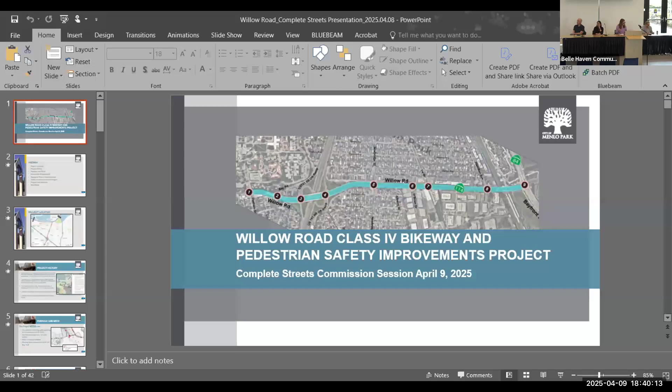Good evening, Chair Cole, Complete Streets Commissioners. I'm Christiane Choi, Senior Transportation Engineer with the city's Transportation Division. Tonight I'm going to be presenting about our Willow Road Bikeway and Pedestrian Safety Improvement Project. The city is partnering with the San Mateo County Transportation Authority to deliver the project. Tonight, Vamsi Tabjulu from the TA is here, he's the project manager for the TA, and I'm also joined by Prasanna Muthareddy, who's with Kimley Horn and Associates, she's the project manager with her consultant team that's assisting on the project.

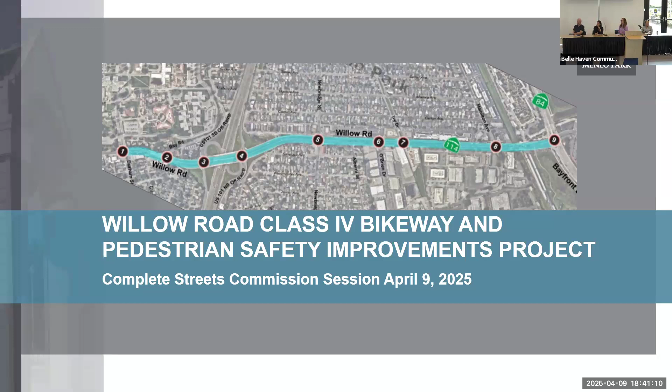So tonight's presentation, we're going to just go over the history of the project, the purpose and need, some of the community engagement that we've held, go into the proposed improvements, talk about some of the analysis we have done so far, then end with the cost estimate and next steps.

So this map here shows the extent of the project. It starts over at O'Keefe on the west side of 101 and then extends all the way to Bayfront Expressway. Most of Willow Road is located in Caltrans right of way, so a lot of coordination between Caltrans and our project team has been occurring throughout the project.

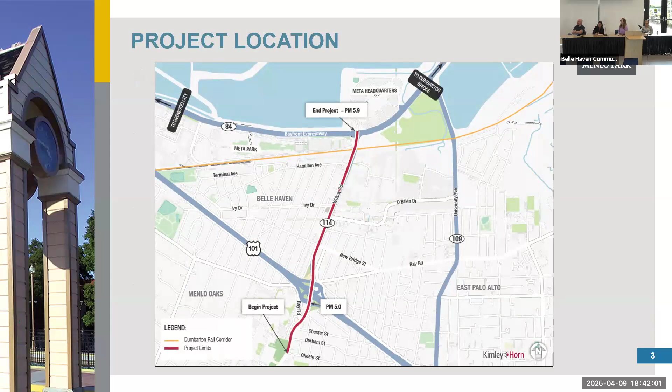Class 4 bikeways have been identified in a number of plans, including the C/CAG Bicycle and Pedestrian Plan, which identified Willow Road as a countywide backbone bikeway network. Our Transportation Master Plan also identified Willow Road as being a high-stress roadway for bicycles due to the high speeds and high volumes of traffic. The Caltrans District 4 Bike Plan also included class 4 bikeways on Willow Road and identified it as a top priority. So in 2023, Caltrans completed a project initiation document.

That was kind of the first phase in starting the project. And then the city then started work on the project approval and environmental clearance phase. That's the phase we're currently in. And we hired Kimley Horn to help us with that work.

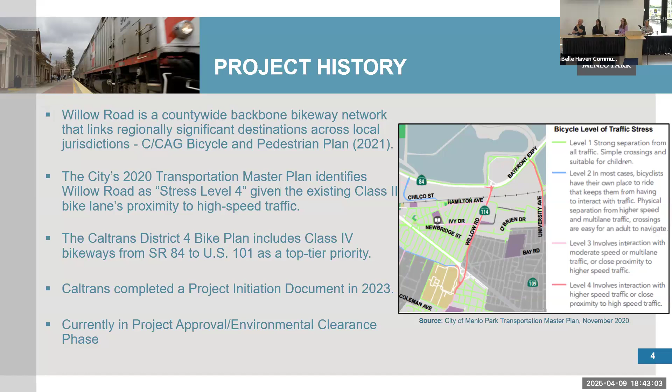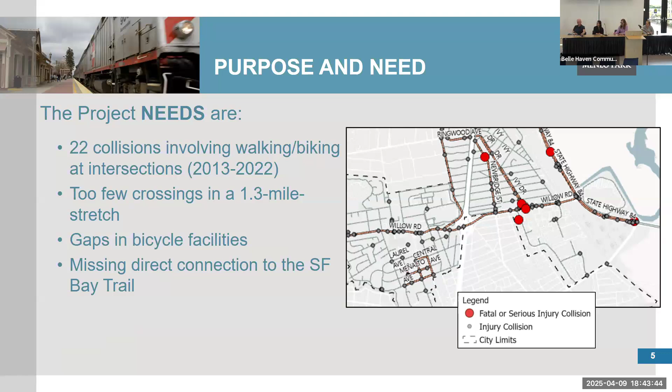So as part of this phase, we've identified the needs for the project and the purpose. There's a number of collisions along Willow Road, and this image here is from our Vision Zero action plan that shows the number of collisions that have occurred. There's also a lot of gaps between bicycle gaps and not as many pedestrian crossings along this corridor. Towards the east, there's not a direct connection between Willow Road and the Bay Trail that's along Bayfront Expressway. Some other concerns are just that the crosswalks crossing Willow Road are long, and there's a number of high conflict areas at the intersections, both for pedestrians and bicycles.

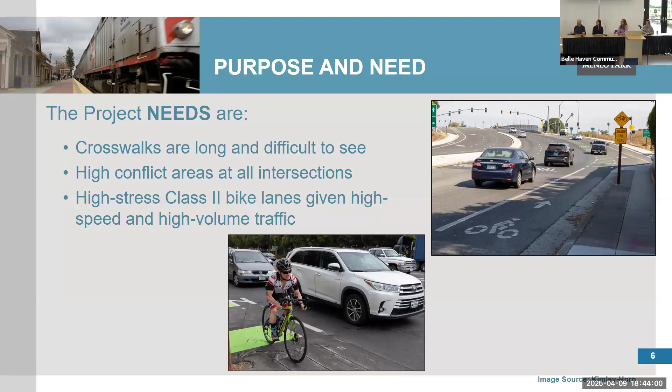So this leads into the purpose of the project, where we want to improve the safety, comfort, and accessibility for bikes and pedestrians along Willow Road, and also enhance that connectivity to the Bay Trail, as well as the neighborhoods along Willow Road. There is bus service along Willow through SamTrans and also the city shuttle service, and the Dumbarton Express, I believe is what it's called. So we are coordinating with the transit agencies to improve their bus stops along Willow Road, in coordination with the bike project.

So those plans that I mentioned had a number of community engagement efforts, but those were for a regional or citywide type of plan. So we also did some targeted outreach focused on this project. We had a couple of pop-up events held in the Belle Haven neighborhood, one at Celestica Market, and one at Belle Haven Elementary School. And then we did an online survey at that time.

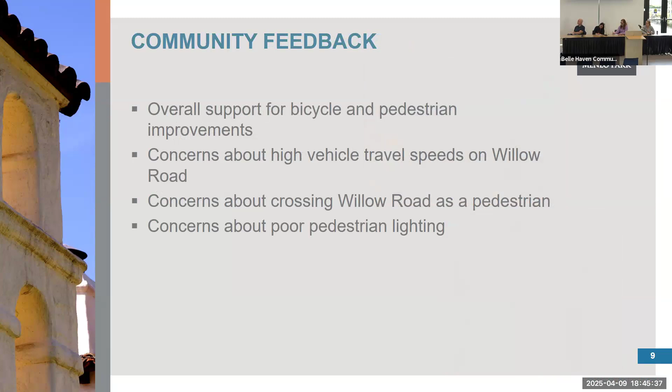Some of the feedback we heard was generally support for improvements for biking and walking on Willow Road, and then concerns as a pedestrian about crossing Willow Road, as well as the high vehicle speeds and poor pedestrian lighting. Now I'm going to turn it over to Prasanna to talk about our proposed improvements.

Thank you, Christiane, and good evening, Chair and Commissioners. So the map here shows the Willow Road corridor. On the north side, or the top of the blue line, is where the Bayfront Expressway is, which is the 84 connection. And on the far south, it ends just before the 101 interchange. We'll go into detail about what we're proposing as far as improvements at the interchange in a minute as we go through the slides. But this is the corridor.

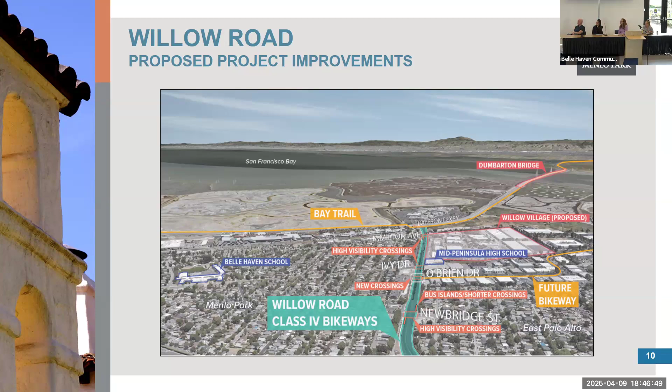Highlighted in blue, and there are some intersections highlighted that show our proposed improvements related to high visibility crossings and a new crossing at O'Brien, etc. So this is just a high-level map. We're going to go into the corridor and the proposed improvements, starting from the Bayfront Expressway at the north or east end of Willow Road, and then we'll work towards 101 and south of 101.

So the main improvement that this project proposes is introducing a Class 4 bikeway. As some of you already know, a Class 4 bikeway is a type of bicycle facility that separates bicycle traffic from vehicular traffic with some sort of vertical separation. In some cases, it's a curb and landscape area. Sometimes it's just a vertical curb. Sometimes it's a vertical delineator or channelizer - some sort of device that separates the bike facility from the vehicles.

In this image here, you see the existing condition, which is the corridor currently has a buffered class 2 facility throughout. And what we are proposing, for the majority of the portion of the corridor where there are no constraints, is to raise the bike facility to the same level as the sidewalk and differentiate it with the type of treatment or pavement used between the sidewalk and the bicycle facility. As far as the vertical element between the traffic and bicyclists, it would be a raised median or a raised landscape area.

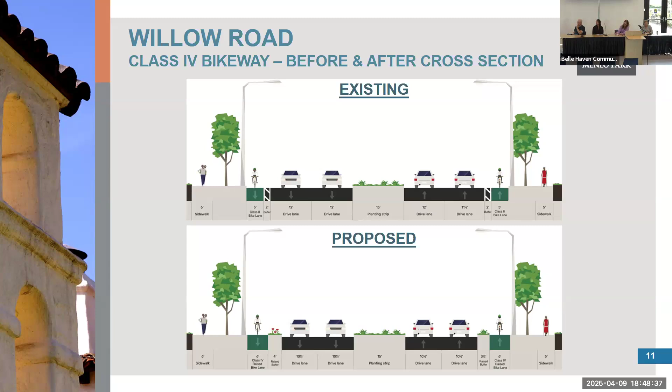This is a visual rendering of one location along Willow Road, where currently on the left you see the existing condition - a class 2 buffered bike lane - and in the proposed condition you see how it is a raised class 4 facility.

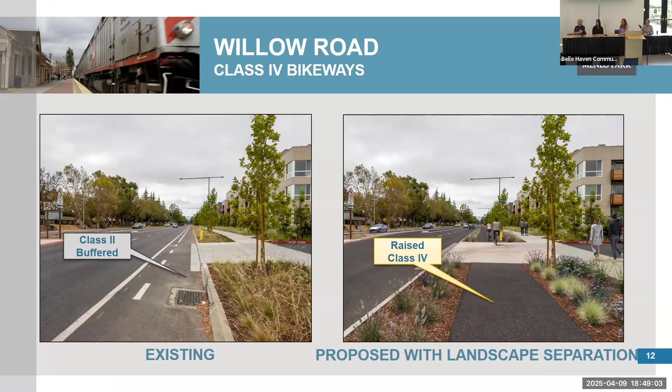There are locations along the corridor where there are constraints in terms of available right-of-way width, or there's a potential future project coming in terms of development, where we do not want to propose improvements that will ultimately be removed or reworked when that new project comes in. So at those locations where it's constrained or there's a future project in planning, we will still continue a class 4 - upgrading from a class 2 to a class 4. However, these will be low cost type of improvements related to vertical separators.

What kind of separators is not determined yet. Those will be determined as we move into the design phase. Currently we are in the environmental phase. These are preliminary concept drawings, and there are several different types of vertical separators that Caltrans and different cities use, and we'll be coordinating on that as we move forward in the next phases of the project.

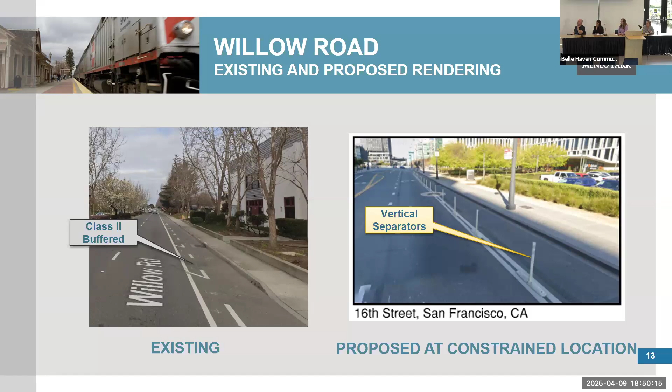We're also proposing, at the ramps, to provide some landing areas or mixing areas between the bicyclists and pedestrians so that there is a smooth transition from one side of the intersection to the other, as the bike facility transitions from a class 2 to a crosswalk to a class 4 in this location.

As we move further south, the next intersection is Hamilton Avenue. Currently, there is already a delineation between bicycles and pedestrians at the crossings. However, we are also providing an inline transit boarding island for buses, which currently is not available. There is a bus stop at the far end on Willow.

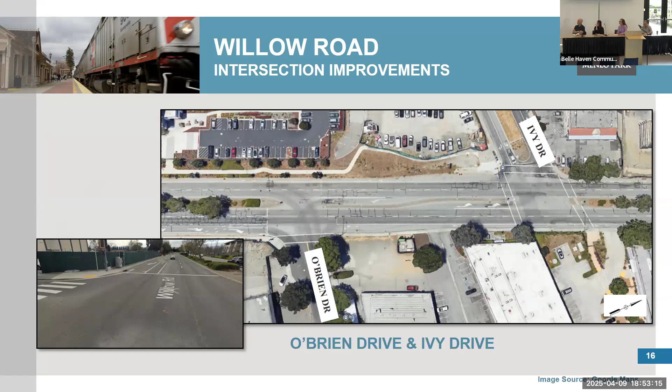As part of our project improvements, the skewed crosswalk at the Ivy Drive intersection is made perpendicular with refuge islands, as well as adding a new crosswalk at O'Brien Drive, providing that additional connectivity to those accessing both sides of Willow Road, in addition to continuing the Class 4 facility throughout.

The next intersection is at Newbridge Street, with similar kinds of improvements. At this intersection, we have transit stops on either side, which we are again providing inline transit boarding islands for. On the south side, or the southwest corner, that's another pinch point where we are providing some vertical posts because of existing utilities and right-of-way issues. Then it transitions back to a class 4 on the other side of the intersection as soon as we gain some more width.

Moving on to the 101 interchange, this is a recently reconstructed interchange. Currently there is a class 2 buffered bike lane that continues from Willow Road and transitions to a class 4. There's an option to either continue on a class 2 or take a class 4 barrier-separated bikeway on the structure itself, on the overcrossing itself. Then it transitions back to class 2 after the ramp intersections on the other side of the freeway.

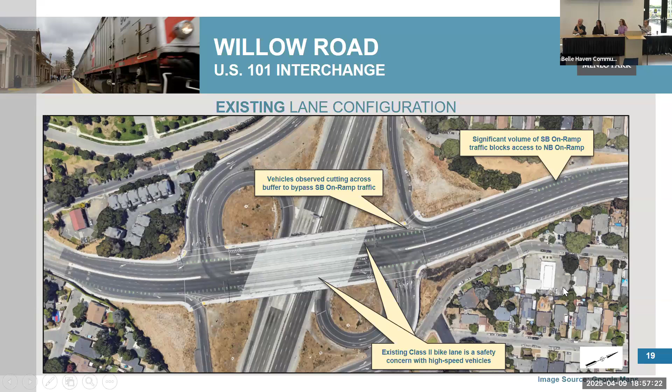Moving to the next slide, what we try to do at the ramp interchange is a combination of improving bicycle and pedestrian safety as well as doing some lane reconfiguration, as we may call it, to allow for better traffic lineup or flow in terms of operations. That ultimately translates to bicycle and pedestrian safety as well.

What is being done here is that on the north side of US 101, we have two lanes coming from Willow towards the interchange, and on the south side of 101, they merge to only a single lane.

There is an opening between Newbridge and the 101 interchange itself, where in current conditions it's 3 lanes to 2 lanes to 1 lane. So what we're proposing as part of this project is to make a dedicated right turn towards the northbound on-ramp, and then keep 2 dedicated lanes that will serve the southbound loop on-ramp, so that eliminates blocking of the northbound on-ramp and eliminates cut-through traffic.

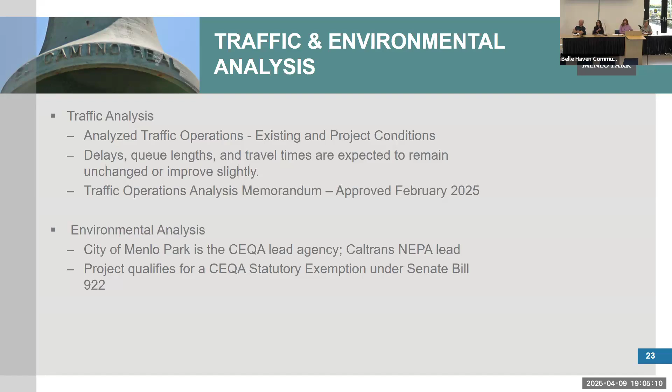Another parallel process is, because we are in the environmental approval phase, we are conducting environmental analyses as part of this. Several technical studies are being conducted. City of Menlo Park is the CEQA lead agency, and Caltrans is the NEPA lead agency. The project qualifies for a statutory exemption for CEQA.

Thanks, Prasanna. So just to go into the cost estimates, as I mentioned earlier, we're in that project approval environmental clearance phase. The next phase would be the PS&E or design phase, and we are fully funded for that via the TA's Measure A & W highway grant. We have partial funding for the construction phase, so we still have a funding gap there.

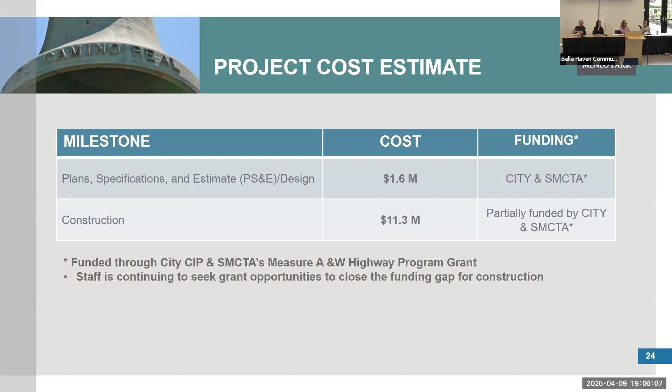You might remember we came to the commission last fall to review the complete streets checklist. That was for a grant application, and unfortunately we weren't successful with that grant application. So city staff are continuing to look for other opportunities to fund the construction.

So just the next steps: we're wrapping up this phase. We're hoping to get that done later this summer with approval from Caltrans, and then we would move into the design of the project later this year. That's when the TA will take over and take the lead in design and construction, with city staff being support staff. Depending on funding, we could start construction either late 2026 or early 2027. And that concludes our presentation, so happy to answer any questions.

Thank you so much, it's really excellent. All right, do we have any clarifying questions from the commission about the presentation before I take public comment? Oh, go ahead, Commissioner Seagreen. Do you want to go first? No, you can go.

Okay, the crossings where the Class 4 new bike lanes cross over the off and on ramps - what does that look like? Is there going to be a signal there? It'll be signalized then, I mean obviously, but... The intersection itself is signalized, and then there is going to be a bike signal as well at the intersections.

Okay, so that's where if a bicycle is detected - we're still debating whether it's going to be camera detection or loop detection or both, because we've seen positives and negatives with both. Depending on that, the detection method will be selected in the PAED phase. If there is a bicycle present, there's going to be a lead time for bicyclists to cross first before vehicular traffic. So there's going to be a separate signal for bicycles and pedestrians, just like pedestrian push buttons.

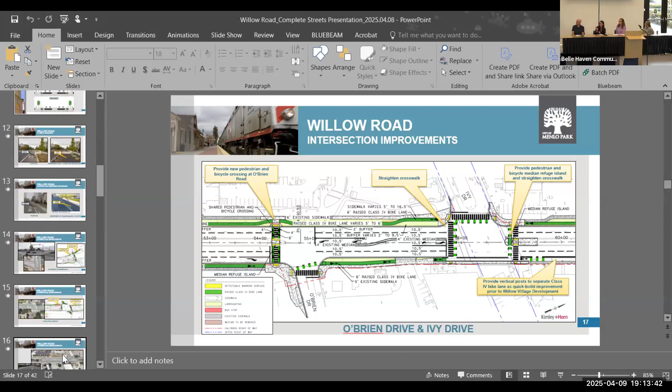And also on the Bayfront one, is it similar - one narrow entrance for bicyclists entering? I know you discussed the type of space for bicycle and pedestrian sorting, but as you're going towards Facebook, eastbound, you have to take this kind of hook across and then cross in that one. Yeah, this is pretty much at the far end of our project.

I know there's another project on Bayfront itself - SR 84 and SR 114, or 114 Willow Road, both are Caltrans facilities. Adding another crosswalk would really change traffic operations, and that's kind of out of the scope of our project. So what we're doing as part of this is, with the current crossings, trying to minimize conflicts between bikes and pedestrians, shorten those crosswalks and make them perpendicular, and add more landing areas for better spacing between bicycles and pedestrians.

Anyone have any other clarifying questions from the commission?

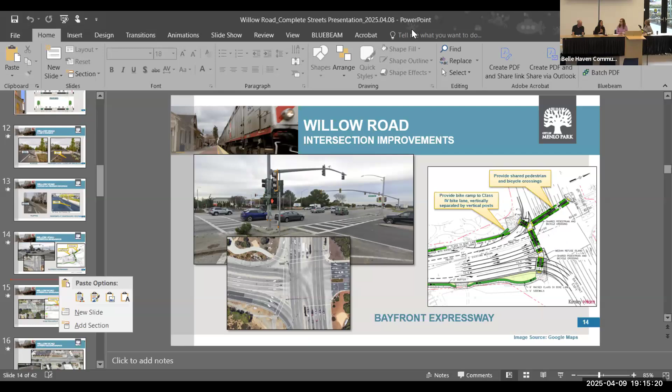Sorry, I have one more question. You mentioned, I don't know if this is directly related to this project, just informational. You mentioned maybe developments not wanting to invest in landscaped barriers because there might be upcoming developments that would need to remove them. Are there existing plans for those, or maybe there will be?

So the main location is Willow Village, and we've been coordinating with that development so that when they come in to build, they would build a raised Class 4 bike facility as well to meet with our project. Great, thank you.

Regarding the 22 collisions that happened along Willow, what are the top one or two causes, and what do you feel the impact of this new design will help with that? Second question: you said there was a gap in the funding and that we were unsuccessful getting a grant. Maybe comment on what the root cause of that was.

Generally, the collisions have to do with intersections. That's our initial data. As far as the full collision analysis goes, we did do that as part of the project, but I don't have the data with me right now to share. I can follow up with that information, but it has a lot to do with vehicular, bicycle, and pedestrian conflicts at the intersections along Willow Road.

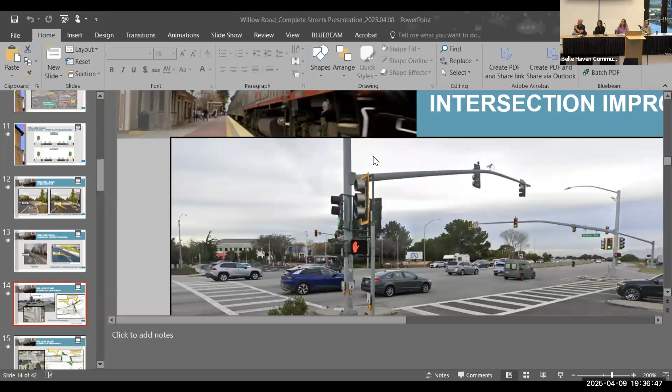So if we can just show the diagram, starting with Bay. The only question I had—sorry, is it Bay or Bayview? I mean Bayfront, sorry, yeah, you're correct. Bayfront, which is the 84. Okay, thank you. I know Athena had some comments on this one—did anyone else have anything, or are we good? Oh, it's separated by vertical posts. Okay, good.

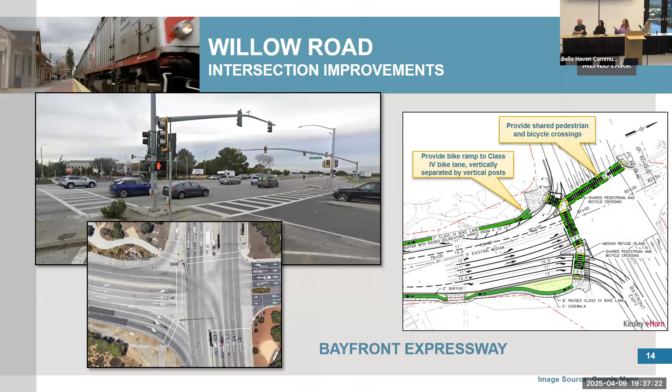Okay, Hamilton. So at Hamilton there's signalized lighting, correct? Okay, in the transit plan. Quick question on the eastbound direction here—it says both buffered with raised delineators and class 4 bike lane. Yeah, it is—when there's a vertical post, it's still a vertical separation, so it still qualifies for class 4.

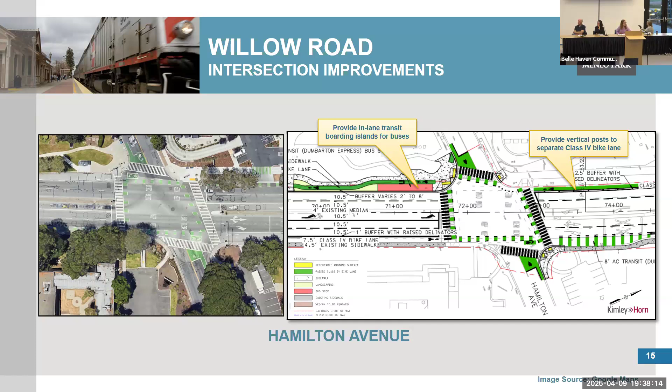One thing, since I know the street less well than you do—if you could point out where an intersection is not signalized, like where there isn't an actual red light stop. This one is one. I think we can move on to the next one, which I believe was Ivy and O'Brien.

They're all lights, but all signalized. O'Brien is a light? Good, that's what I wanted to know. Okay, I feel better, thank you.

So this was one where there was a refuge island at Ivy, and I was curious why you put it in this intersection and not others. There is an existing median there that allowed for that refuge island, and we also have it at O'Brien. So if you see on the left crossing of Ivy, because there are two left turn lanes, that middle island is shared with those two left turn lanes. There's hardly any space for us to provide a refuge island for that particular crossing. But for the right side crossing, because we had that median, we took advantage of that to provide one. So it's really fitting to the existing constraints and providing the best that we could.

So is there one planned for Newbridge? And I just wanted to add that this is Mid-Peninsula High School here. That's really good, right?

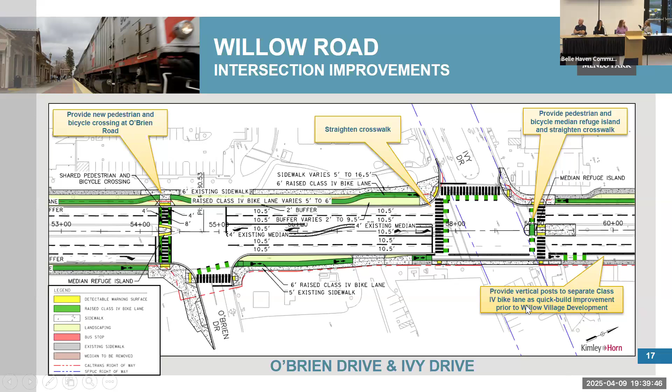I'm just curious about Newbridge because we talk about kids crossing to get to school. Obviously we've got the high school, but kids crossing to get to Belle Haven Elementary, for example, are they crossing at Newbridge primarily? There's schools there, right, so if you're going... I'm not saying it doesn't happen, but I don't see crossing Newbridge to Belle Haven.

And Ivy is a much nicer, straighter route. Okay, good. And Ivy has the refuge island. I'm not sure, but I'm happy to hear that the island's in the right place. I think there are some students crossing here at Newbridge, but they might be going to MA high school instead, or maybe to access the transit stops.

I have a couple of comments. I see a lot of kids biking to, I think, the two schools that are on Willow close to Pullman. Oh, Silicon Valley International, and then there's KIPP, or KIPP Valiant.

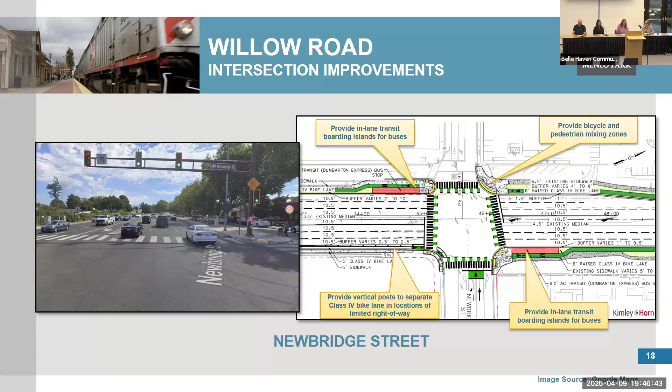I mean, people are terrible there. But it is dramatically better.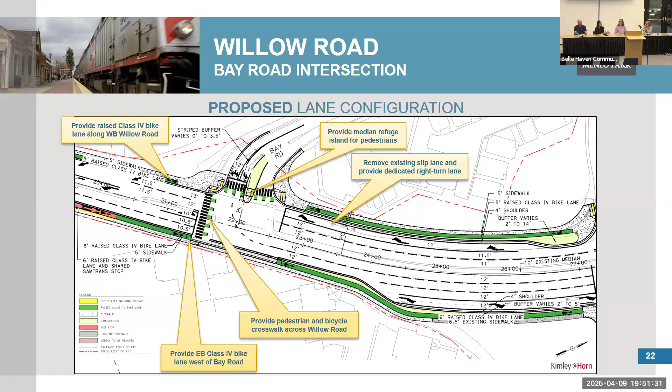Of course. I think a lot about Willow, especially the overpass. As someone who bikes over it every day, there's behavior that's quite dangerous in its existing form but would be less dangerous with the class 4 bike lane - people in the straight moving lanes cutting across traffic to turn onto the southbound ramp, and then nobody lets them in, so they sit in the bike lane and wait. That conflict with bikes will be removed once the bike lane moves to the protected area, but there could still be that kind of traffic behavior where cars try to cut across into that right turn lane.

Maybe having 2 lanes there would help, but have you guys thought about that behavior at all? I think it's quite dangerous for people in cars too.

That's exactly what we're trying to correct with having 2 lanes going onto the on-ramp. Part of the reason they do that is the on-ramp is wide enough to get 2 cars side by side. Once we have 2 lanes turning right there, it would be difficult for a third car to do that, so there'd be a more directed traffic flow.

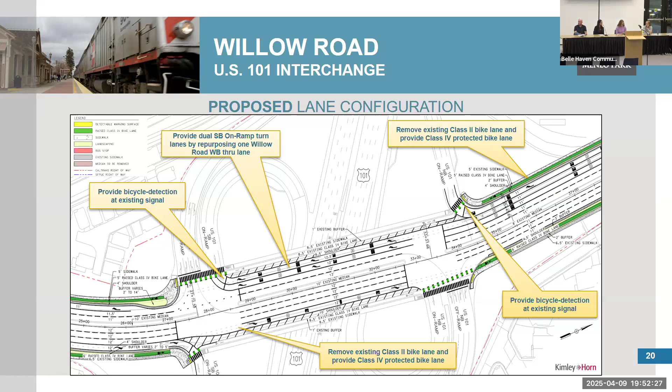Well, if we've given all the feedback we have, I guess that's done - we're not making a motion? I can't see on here, it doesn't look like we are. This is just informational. Well, thank you again, and if the county hears of any grant programs, let us know. Thank you.

Great. Thank you, and thank you for your work. Thank you. All right, then we will move on to informational items.

Under informational items, city staff provides an update on matters of importance to the commission. Informational items are not action items, however a commissioner, city staff member, or member of the public may request to make a comment or ask a question on any of them. Let's start with, are there any updates on major project status? Katrine, do you have an update? I do not have an update. That's okay, so no need to call for public comment.

Let's move on to the tentative Complete Streets Commission agenda. Katrine, do you have updates on that? I'm not even sure. I think the biggest change was that this item we discussed tonight, Willow, was removed because we talked about it. I don't think I added anything new.